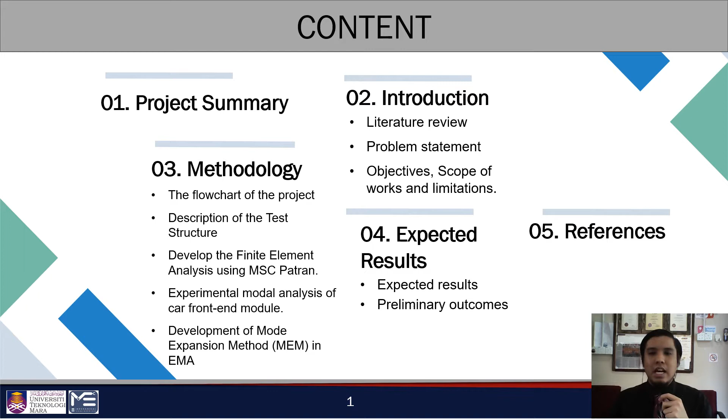So we go to chapter 1, which is the project summary. This project is performing experimental modal analysis on a geometrically complex structure such as a car front end module. The difficulties arise because the responses on certain degrees of freedom cannot be measured due to limitation for placing accelerometers with accurate orientation. Then, the natural frequency and mode shape of the car front-end module will be measured using experimental modal analysis, EMA.

Lastly, the EMA will be performed on a free-free boundary condition, and the SEREP expansion method will be performed to obtain the unmeasured degrees of freedom of the car front-end module. The outcome from this work is expected to provide a useful guide for obtaining the unmeasured degrees of freedom of a geometrically complex structure.

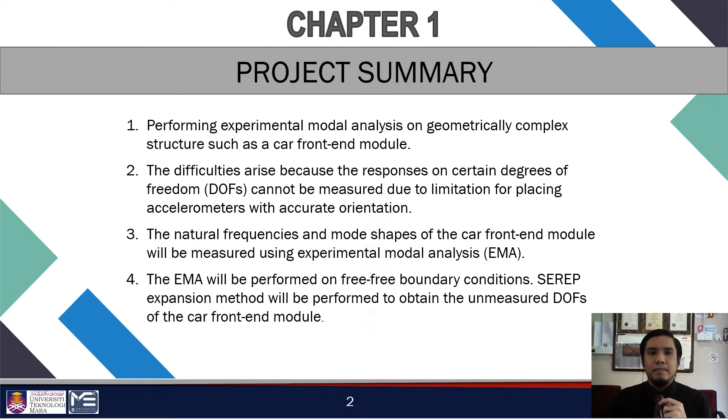Next, we cover chapter 2, which is introduction. Generally, a vehicle, especially a car, whose components consist of various structures, is an important element involved with vibration phenomena. Undoubtedly, in almost all practical situations, structures with complex geometry will experience difficulties and inconsistencies in comparison of measurement between FE, which is finite element, and the experimental modal testing.

Usually, the incompatibility appears due to two different things. The first one is that only certain degrees of freedom can be measured. Second, not all mode shapes can be measured. The difficulty also arises because of limitation for placing accelerometers with accurate orientation. Besides, the data acquisition equipment also limits the frequency range to be measured.

In general, the finite element model is widely used and conventional. This method could be very large, to several thousand degrees of freedom in some cases. Thus, the difficulties that arise can be overcome and solved by using the mode expansion method, MEM. In performing the expansion process, there are 4 main techniques used, but this study only focuses on the SEREP expansion implemented on 3 different EMA of the car front end module, and then the accuracy of the expanded mode shape is evaluated and quantified using modal assurance criterion, MAC, analysis.

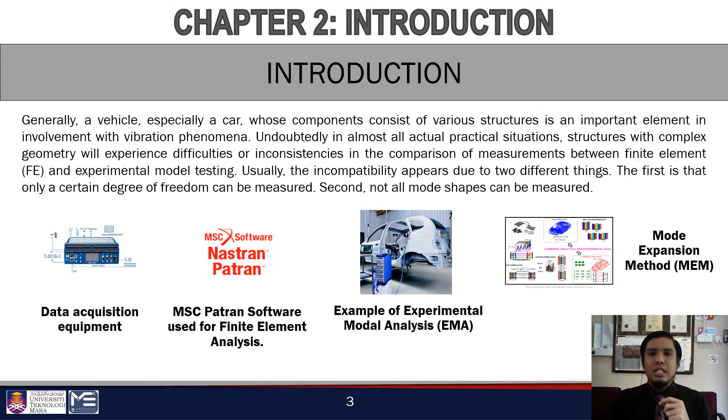Okay, we are still in chapter 2, and I would like to talk about the literature review. This literature review covers 2 different elements, which are finite element model and analysis, and also mode expansion and modal assurance criterion. From previous studies and a few journals and research papers that I got from websites and other resources, it's claimed and explained that the finite element method is basically the most frequently and effectively used to model complex structures like bridges, buildings, dams, containment vessels, and so on.

Another research paper, on expansion of experimental mode shapes from operational modal analysis and virtual sensing for fatigue analysis using the modal expansion method, explains that in order to produce the transformation between master and slave coordinates, SEREP expansion uses theoretical eigenvectors. It is very precisely related to the expanded mode shape.

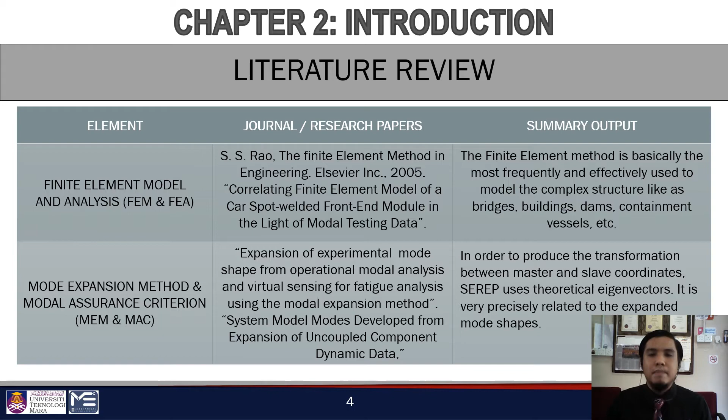So next, I would like to explain the problem statement for this project. To be specific, the front-end module of a car will definitely vibrate when resonance occurs. It causes the structure to suffer bad damage. And the modal parameters such as natural frequencies and mode shapes of the car front-end module are essential information for the dynamic analysis of the structure. And lastly, degrees of freedom are difficult to obtain because of the geometrically complex structure, due to limitation in placing accelerometers with accurate orientation.

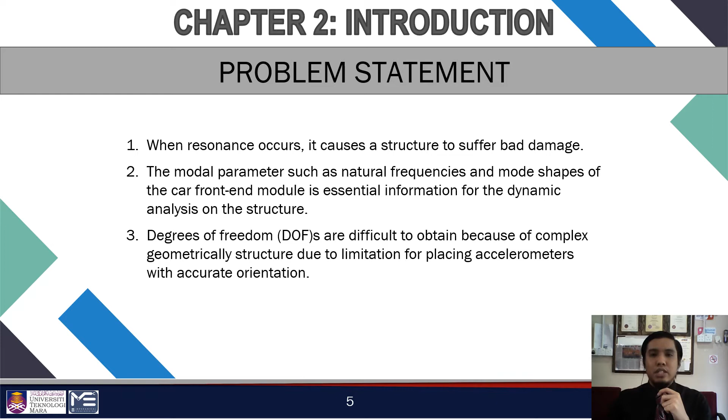So next is the objective, scope of work and limitation for this project. There are three main objectives, which are to develop the finite element model, FEM, of a car front-end module. Second, to determine the mode expansion method using three different EMA models of the car front-end module. And lastly, to evaluate the accuracy of the expanded model of the car front-end module.

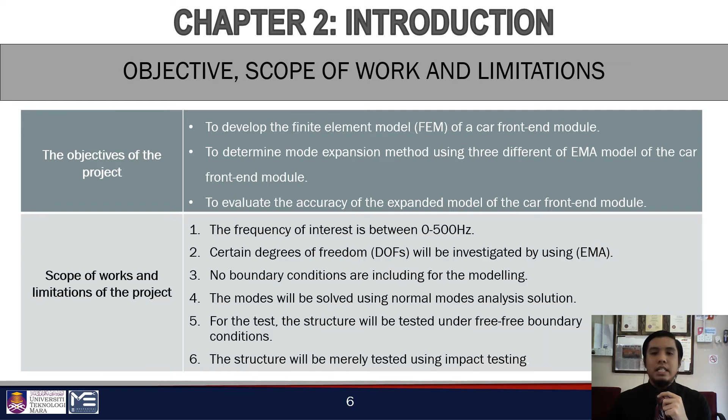For the scope of work and limitation, first, the frequency of interest is between 0 to 500 Hz. Second, certain degrees of freedom will be investigated by using EMA. Third, no boundary conditions are included for the modeling. Fourth, the modes will be solved using the normal mode analysis solution. Five, for the test, the structure will be tested under free-free boundary condition. And lastly, the structure will be merely tested using impact testing.

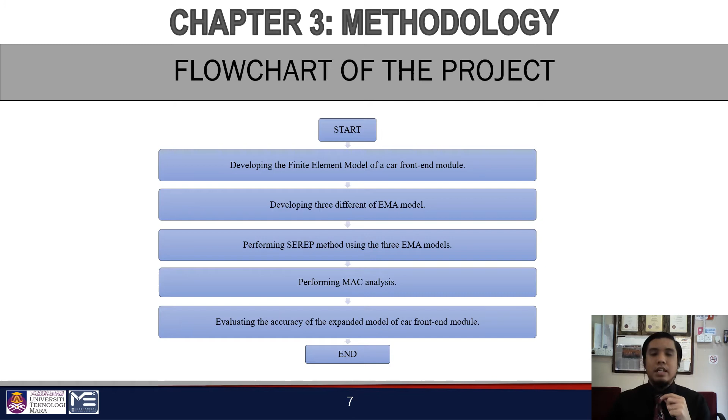Okay, now we jump to chapter 3, which is methodology. Before that, I would like to show you the flowchart of the project. It starts with developing the finite element model of a car front-end module. Next, developing three different EMA models, and then performing the SEREP method using the three EMA models. After that, performing MAC analysis, and lastly, evaluating the accuracy of the expanded model of a car front-end module.

Okay, next, the description of the test structure. The proposed approach will be implemented on the front-end module of a car. As a case study, this structure is used because its configuration is considered to have a main and important role in the vibration level of the car.

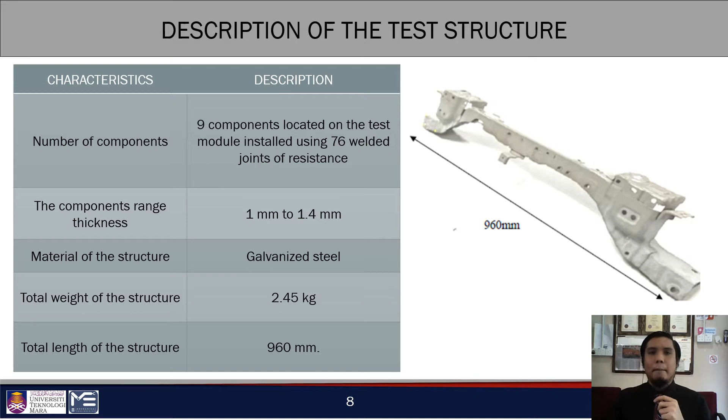Okay, next, develop the finite element analysis using MSC Patran. In implementing the finite element model in the CAE software, 2D shell elements are used in the expansion of the FE model, as shown in the figure.

Since the geometry of the test module is so complex, several variations of element size are used, in the range of 5 millimeters to 8 millimeters. Therefore, in the creation of the FE model of the test module, a total of 6,010 nodes and 5,530 elements were developed.

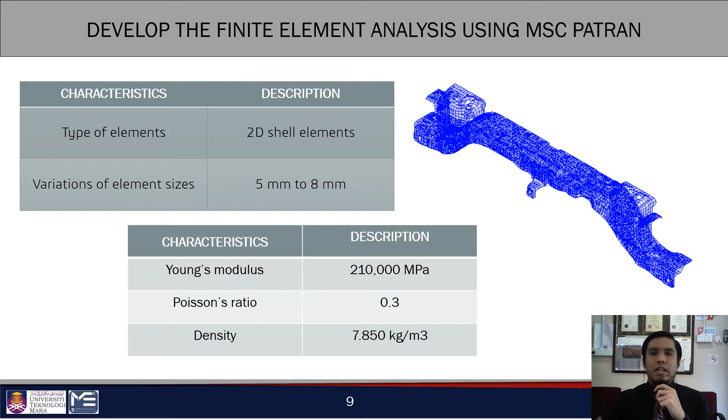It is assigned a Young's modulus of 210,000 megapascal, Poisson's ratio of 0.3, and density of 7,850 kg per cubic meter.

Now we go to experimental modal analysis of the car front-end module. The experimental modal analysis began by rigging all the equipment as shown in the figure below. The test module is suspended using two soft springs to simulate the configuration independently.

The experiment was also set with a frequency resolution value equal to 0.5 Hz and a frequency bandwidth in the range between 0 Hz to 512 Hz.

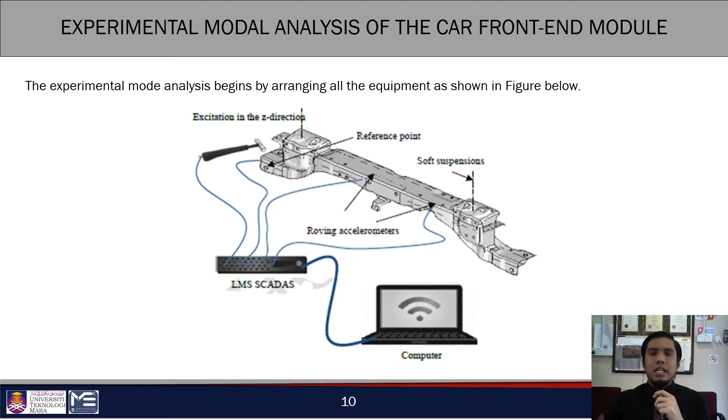For the success of this work, experimental modal analysis (EMA) is used in measuring the natural frequency and mode shape of the test module. In addition, three types of measurement configuration are also designed and conducted to model different elements.

Okay, next subtopic in methodology is development of the mode expansion method in EMA. As you can see in the slide presentation, it shows the type of measurement configuration of the car front-end module.

First is full EMA configuration. Second is middle only measurement configuration. Third, both side only measurement configuration. And lastly, 1D line measurement configuration.

There is only one technique applied in the mode expansion method for the expansion process in this work, namely SEREP expansion. SEREP expansion can determine the unmeasured and difficult mode shape and natural frequency. The SEREP expansion method is applied according to the equation below.

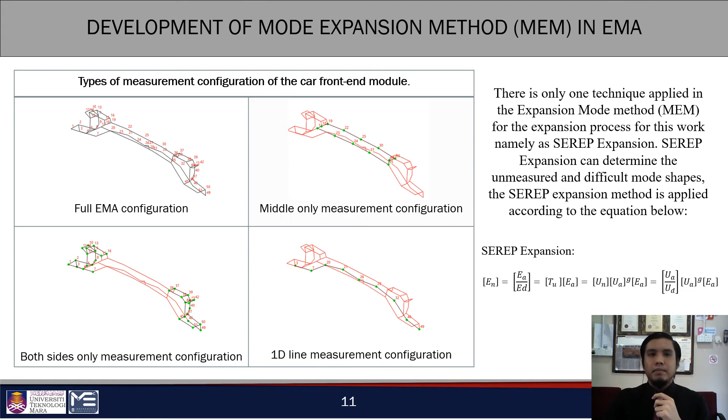Okay, so now we go to chapter 4, which is expected results. In expected results, there is also a preliminary outcome. But first, I would like to show you the expected result.

The first is that the natural frequency and mode shape of the front-end car module can be successfully calculated using normal mode analysis. Second, using different EMA models will result in different expanded mode shapes. And lastly, the expanded model is expected to be accurate with the EMA result.

As you can see in the figure below, it shows the FRF reference point of the car front-end module that has been tested. There were 52 unidentifiable measurement points, while the 52-point response was measured by two roving accelerometers. The test structure was completely excited 10 times to obtain good and reliable data results.

All responses were analyzed using the LMS Test Lab, while a least square method curve fitting procedure was used to obtain the frequency response function.

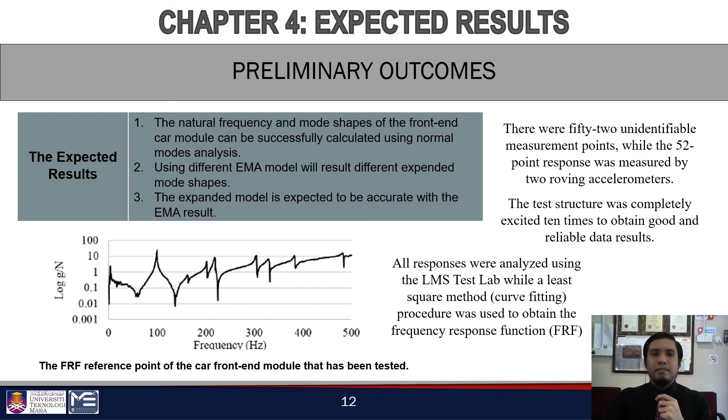Continuing the preliminary outcome: in determining the quality of FRF measured from the FRF excitation point, an analysis approach is performed by observing the result of the coherence function. The quality can be applied and accepted if the coherence value approaches 1.0.

The average result of 10 times excitation of the reference point coherence is shown in the figure, and it shows a good coherence value when approaching 1.0.

Then, the second figure is the total FRF of 52 measurement points, presented from 8 modes defined within the frequency range of interest.

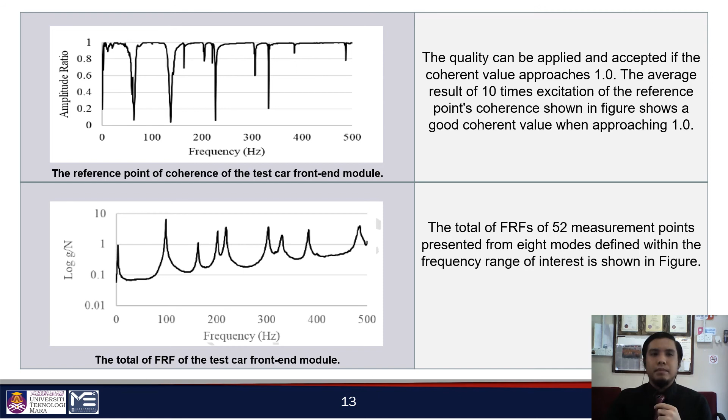Okay, next topic covers the comparison of natural frequency between the initial FE and full EMA. The diagonal value of MAC, which are close to 100%, usually express the similarities between the FE and the shape of the measured mode. Six modes were determined from the finite element model and EMA in this work.

As you can see, there was a lack of correlation between the initial FE and EMA in terms of natural frequencies, particularly for the fourth and sixth modes. In comparison, a high MAC value in mode shape was measured with a 4.36% error. Mode 6 is the largest contributor, at 11% of total error.

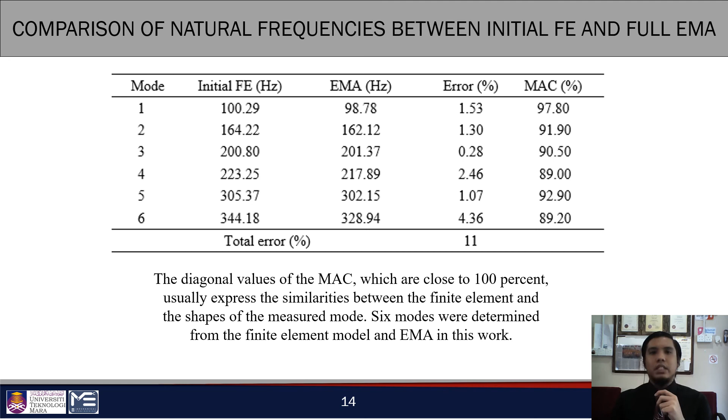The fourth mode also recorded the lowest MAC value, at 89%.

Last but not least, the comparison of mode shape between the initial FE in column and full EMA in row. The table shows the assessment of similarity of mode shape between the finite element model and EMA, analyzed using the Modal Assurance Criterion (MAC) calculation.

The table shows the diagonal MAC value for the mode shape. It is clearly seen that, with 89% and 89.2% respectively, low MAC values were found in the fourth and sixth modes. However, in this study, we are only interested in the first six natural frequencies and mode shapes obtained, because it is considered sufficient for the final year project level.